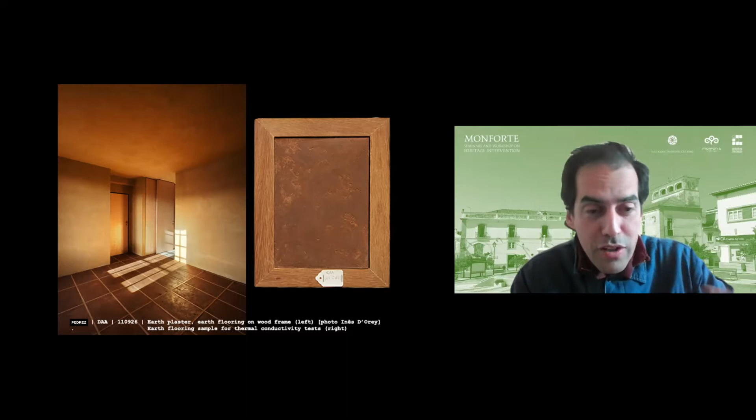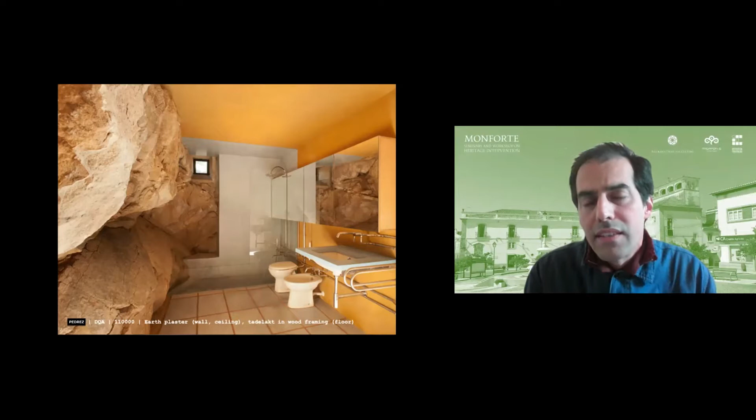So we've been on a trial and error research, and we finally started supplying this service of making earth floorings. But we cheated a little bit, because we broke the flooring into these wooden rectangles to make it more feasible. Otherwise, it was very difficult. We then went on researching plasters, how to make earthen plasters water resistant, not with mineral binders, but adding oils and resins. That's a very interesting field, and I've been working on this.

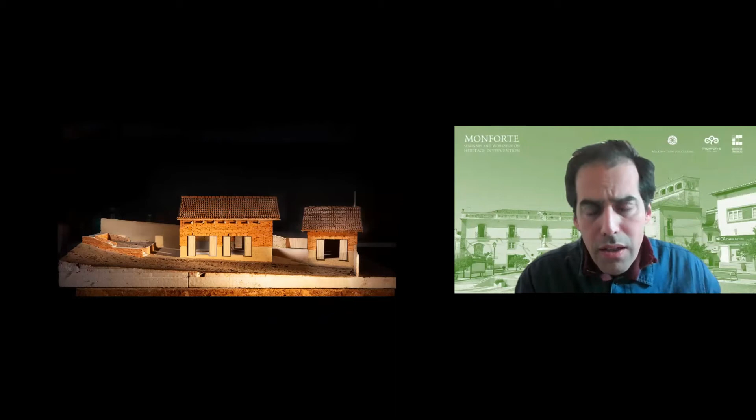And as a way to prepare our building sites, we used to make models, and from models we go into the building site, and then you start truly researching, and we've made several buildings that are just fetching materials from the site. In this building, for instance, as we dug the ground level, we found that the building was on top of a clay. How do you say this? Filão de argila, a clay river, let's say.

It was common that people would set their buildings on top of clay strata, not deep clay, but the superficial clay strata, because all the water questions in the foundations were sort of solved. And so we found this beautiful clay material, which we turned into a plaster, and we use this extensively as much as we can for the building elements, walls, ceilings, roofs, etc. And from here we started to research.

I show you models because this is an elemental tool for me, a research tool, not a scientific tool as you know it, but an inquisition tool, a way to open your mind to solutions and navigate possibilities. And then we went on, especially making wineries. Winemakers are a very special kind of client, because they have a sense of time that is very special. And still on this research and involvement with clay, with earth building, we made a building, all of them very small buildings, but very experimental.

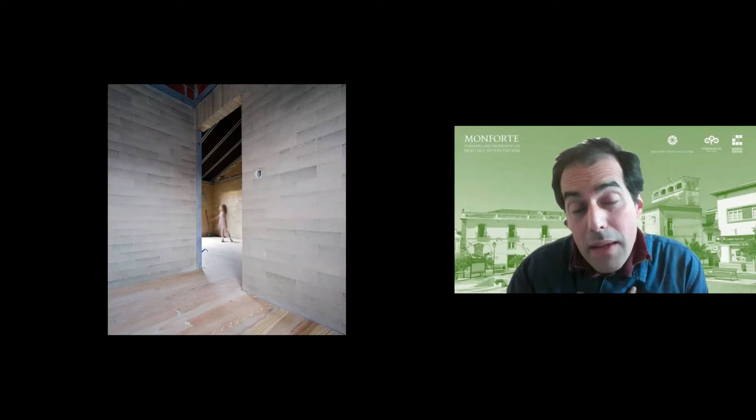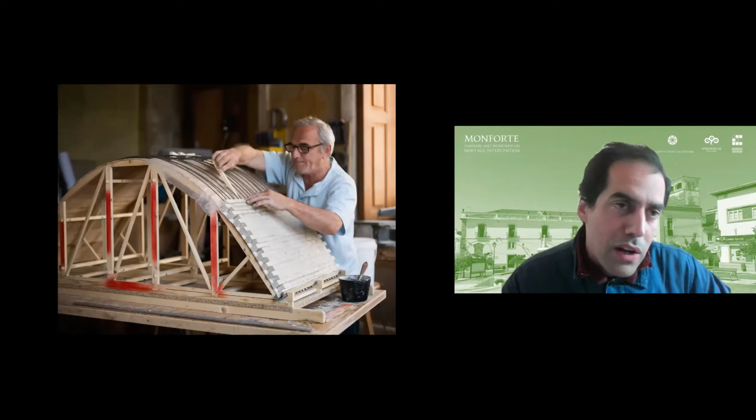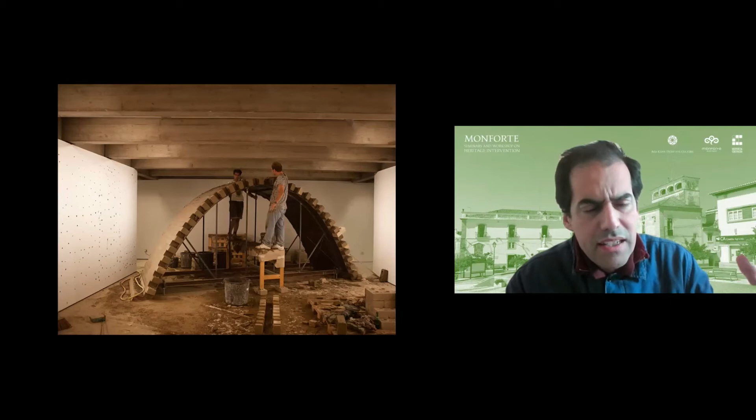And so as a preparation to an exhibition at Gulbenkian, we used the same blocks for this private house I just showed to you. We made some catenary arches. We tested them first in a model, then we test them in a real site. We loaded them very empirically, enough empirically. And then we finally got the arch into the art gallery, and there's an understanding that comes from the process of doing that I prize very much.

Well, from this point, I got a client who said, I have this small house in the city center of Porto. Can you renew it? And I said to myself, maybe it's the time to do it only with earth, only with raw earth. So we made this. So we had to solve the questions of flooring. The compacted earth flooring is very, very expensive, and it's tricky in many senses. So we started to compact earth bricks into mosaics and use those mosaics for flooring.

We bought 14 big bags of earth to make the building, and we completed the building with 12 big bags. So there were 2 leftovers. And we explored what raw earth allows you, which is to work with organic materials, with animal and vegetable proteins, with oils and resins. So in this building, we actually started this exploration into vegetable materials, oils. I'm just showing you ceilings and floors, the way we reuse the existing wood.

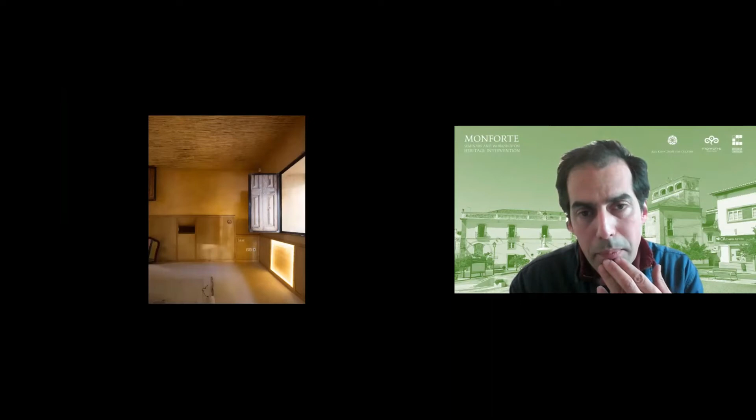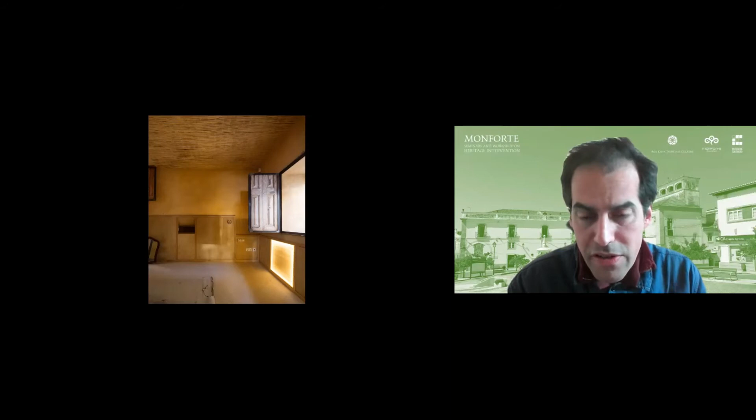These are pictures of the same building. You see the bottom part of the walls are heavily impregnated with oils. The top part of the walls is just raw earth. Then in the ceiling we use vime. Vime is reed, from rivers, from wetlands. We also kept, of course, all the tabique, as Esmeralda was nicely putting the importance of this.

And well, at the end, I'm very happy with this experience. My client as well, happily, also for me, that it went well. You see all these yellow glasses because we use beeswax as a symbol of this construction that is directed to nature and society. So construction as a tool for a social sculpture. Okay, so we've been working with the beeswax as an ornamental element as well, and dreaming about building something with straw.

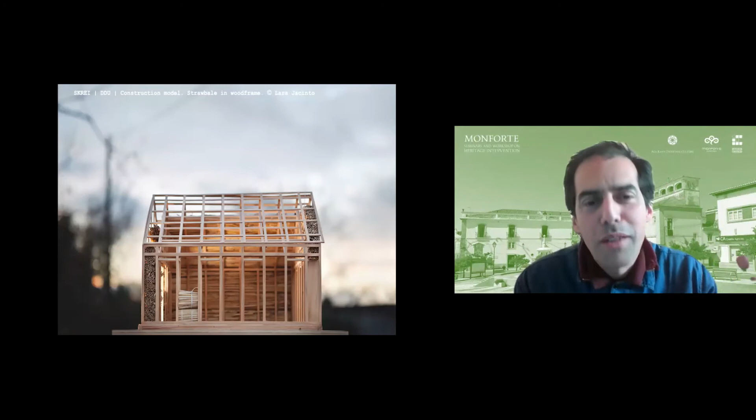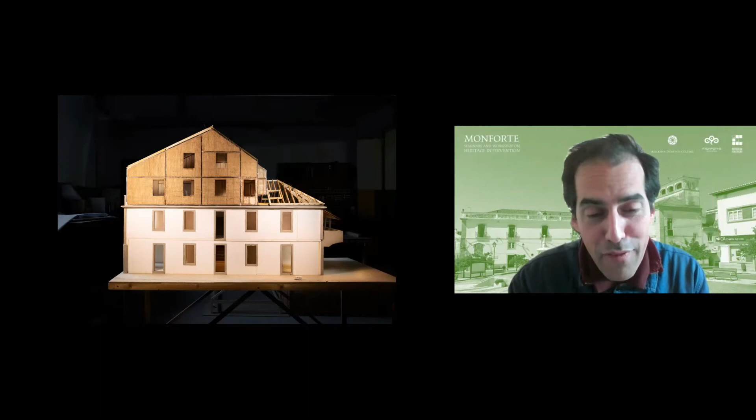I mean, we never got to build with straw or straw bales, so we made models of it, and we thought of this, you know, how would it be? But then suddenly we got the opportunity to build with hemp, with the hemp stalk, commonly called the hempcrete, but it's not more than a sort of adobe, vegetable adobe, let's say. These are discussions I have with Bruno often.

So we first tried it on a maquette, on a model. This is the building, so it's existing part of the building, the first 2 floors, and then the top part of the building we added this hemp construction. So we kept all the bottom floors. We found some beautiful paintings. We kept them all, and then we added these hempcrete blocks and hempcrete concretes, let's say adobe sort of concretes, to the walls in different fashions.

I can show to you, for instance, this is a wall. You see many cracks, many things went wrong, many things went fine, but nothing was neutral, basically. You see the cracks in this high wall, some 5-6 meters high wall. This is so-called hempcrete, which is a mixture of the hemp stalks with lime and clay. We use clay as a pozzolana.

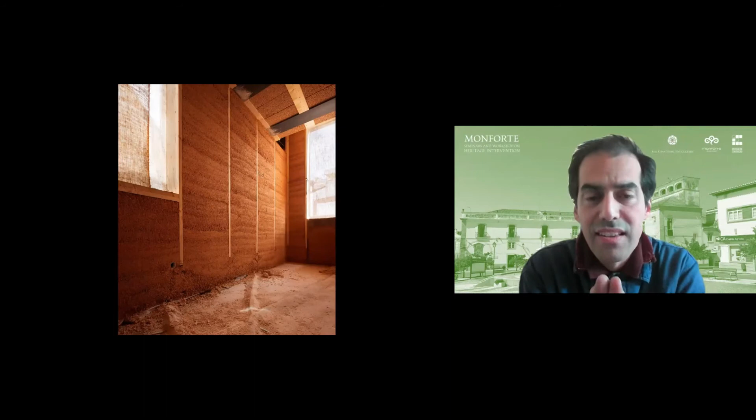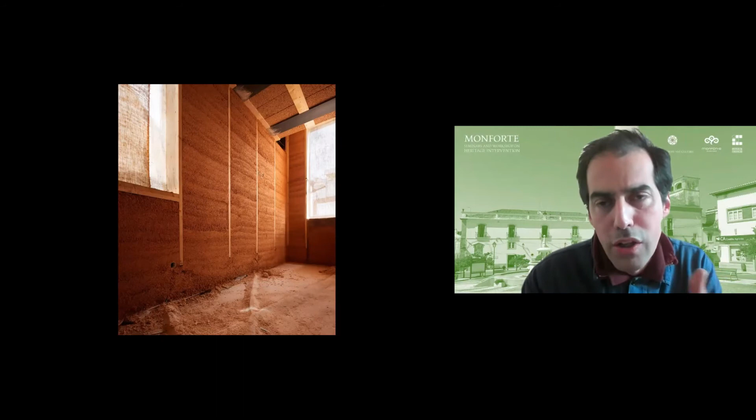This is pink or kind of orange pink because the metakaolin clay we found here in Portugal at hand is this one color. So we go for the color of the materials. But something that you might notice is that the building is wrapped in cloth, in textile. We started researching textile as a formwork for hempcrete, because hempcrete has a lot of friction inside. So you can just pour it into the formwork and remove the formwork immediately. You don't have to wait. And so we started to realize that a textile works perfectly as a formwork.

So this building is an experiment of a kind. You don't find possibly many of these, not only in Portugal, I guess, but one of the reasons I say this is because the building was once wrapped in a textile. You see it on the left side of the picture. This is jute textile.

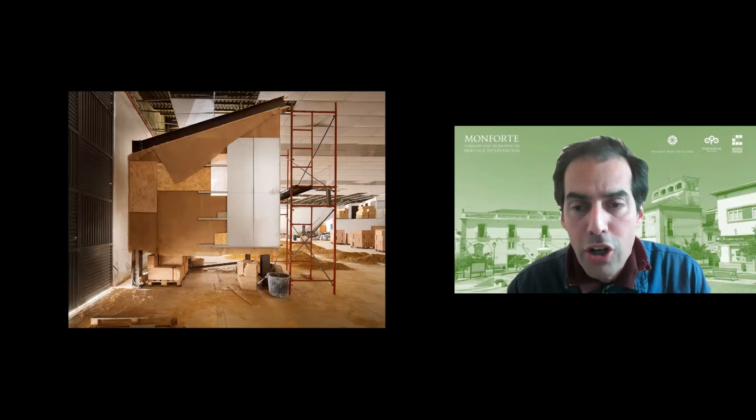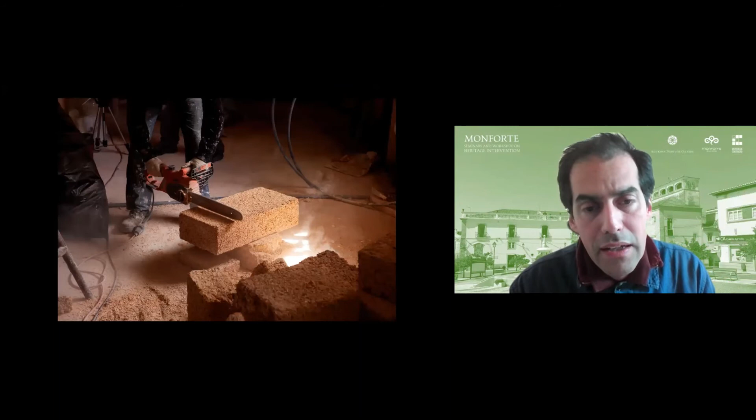And so in order to get there, we make one-to-one samples, prototypes, and many people are involved, of course, basically the builders. My suppliers, the people who work with me on the building site, they have to test this, and they take part in the making of it, as much as academics and technicians of all kinds. But then we also got to the point that we made hemp bricks.

This was in 2019. Okay, so 5 years ago, man. Huh? Yeah, it's 5 years ago.

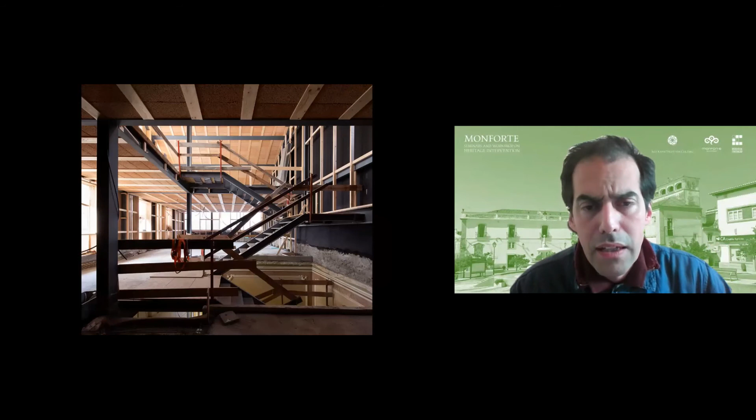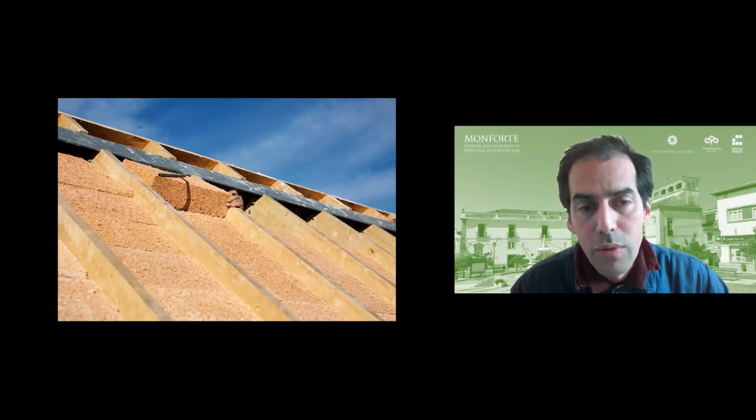So the hemp bricks were also very revealing. Very fast to build with, very effective in all senses, and particularly that we recycle everything on the site. All the hempcrete that is left over, we bring it into a machine that recycles it back into hemp blocks. I will not extend myself too much on this. I'll just drop you some pictures. These are tests with plasters and renders.

We did not know how to do this. To tell you the truth, we don't know yet because the time has been too short. It's 5 years or 4 years, 3 years since the building was finished. It's not enough to say I know something about plastering hempcrete. But anyways, we went from experiment to experiment, and we draw our conclusions.

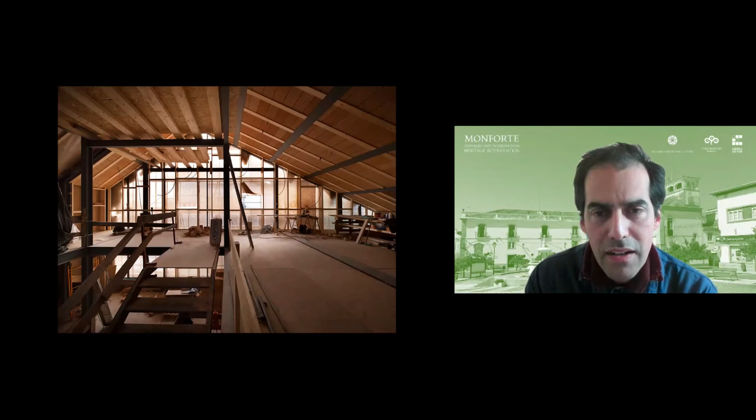I doubled the pictures. Well, and we got to the point that we start to use oils into the hemp stalks, into the wood, because we all know that wood, when with oils or resins or waxes, it's a perfect mix. It gets new properties, characteristics, qualities. So we went this way of making hempcrete resistant to the outside, to the exterior aggressions and rain, funguses. And so we started working on this multiple layered block, which I wish I can show to you.

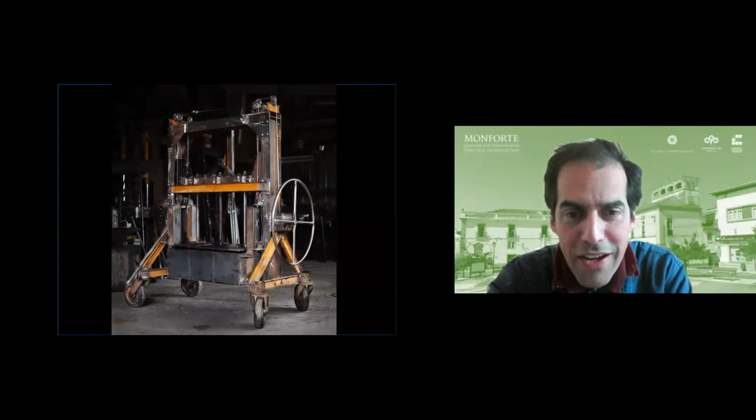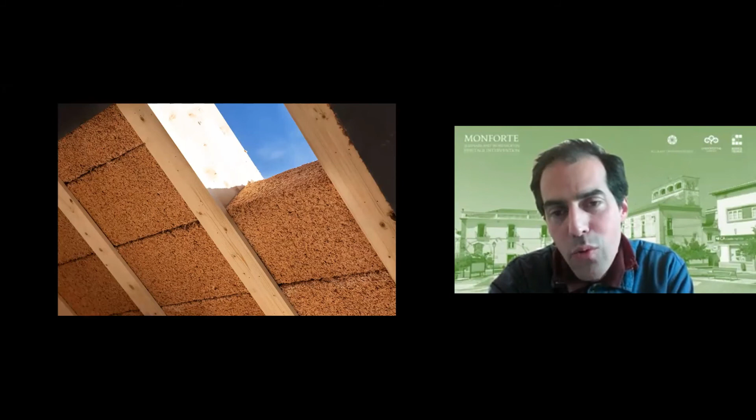I mean, if I go back into these pictures, I might spot one of these multi-layered blocks, but no, sorry, I haven't brought any to the presentation. A mistake of mine. I mean, it's just one of these blocks, but with, let's say, 2 layers. Okay, one layer is meant to... oh, here you can see, at the second part of the building is blue. It has a blue layer into it, and that blue layer was an indigo layer.

So we added indigo just as a trial, just to see how it works. We added indigo into one layer of the block to get into this kind of grayish, bluish effect. And then we said, okay, for the inside, we see we can get nice results. Now let's deal with the outside of the blocks. So with the exterior layer of the blocks, let's use the, how do you call it? Charred wood. So charcoal wood.

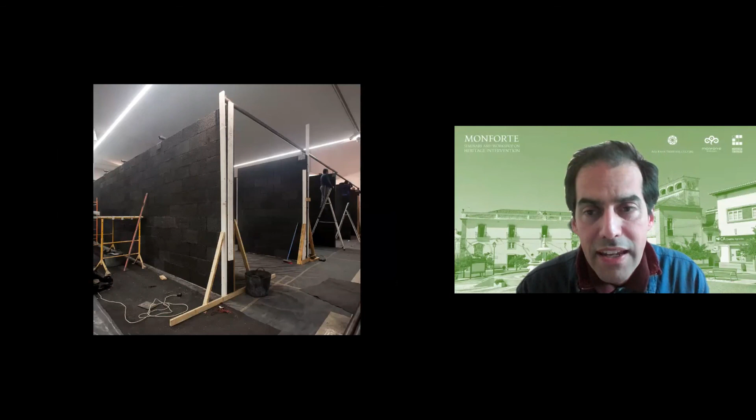So we started burning the hemp stalks and trying to add charcoal. So we took out the clay. We add some charcoal pozzolana, vegetable charcoal, and at that point, an art curator comes to us and says, "Hey, I want to make an exhibition on this in our contemporary art museum." So the first thing, we never made a 3-layer block, with the inside layer, middle layer, and outside black layer. We went immediately to these black blocks, which we call the charcoal blocks or black hemp.

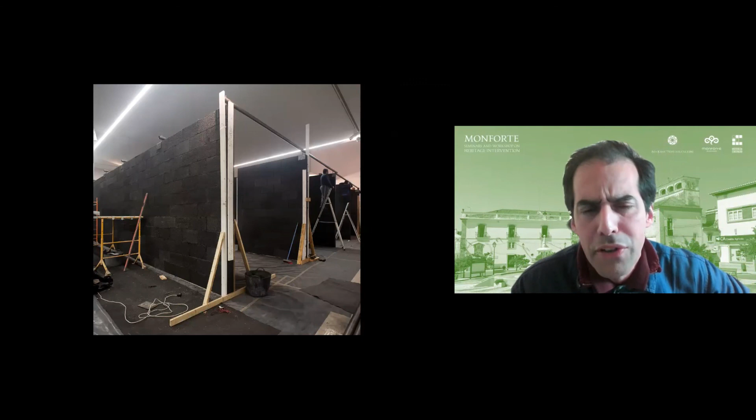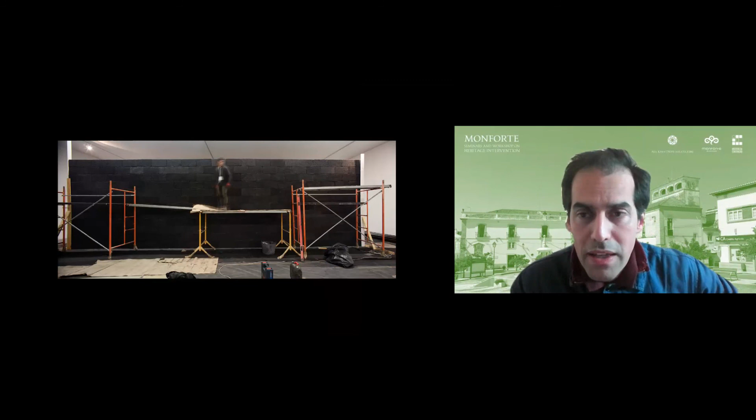And we made this one building. I mean, we were astonished with the acoustics, and also throughout this research, we realized these blocks have some electromagnetic properties which are worth researching. In terms of how it's a nanoporous material, so it behaves in a very particular way with electromagnetic waves, specific frequencies. So well, we made these very high walls, and this is a black slide. Okay, and then here's the model of the exhibition, the curator.

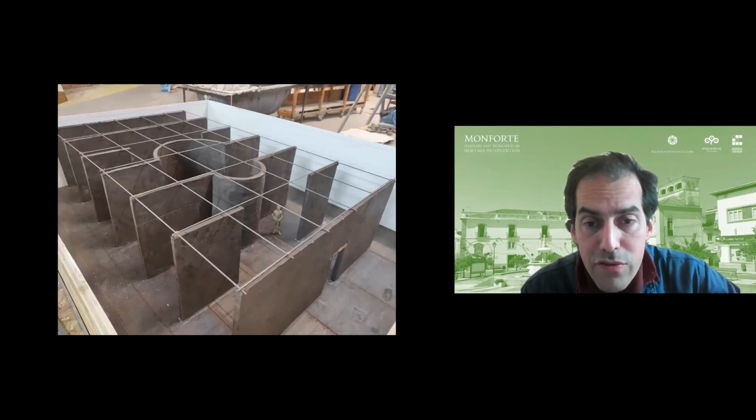Well, then we got a client, and this client said, you know, I want to build with hempcrete. I want to do something special. I opened for it, so I said, well, let's recycle the exhibition into your house. So we first made our prototype of the house, and then we broke down these big walls I've shown to you, and we made some sort of, let's say, a prefab masonry wall. So we brought these walls into the building, and you know, we've got somewhere. I mean, the building is standing there as it is, not as this picture I showed to you.